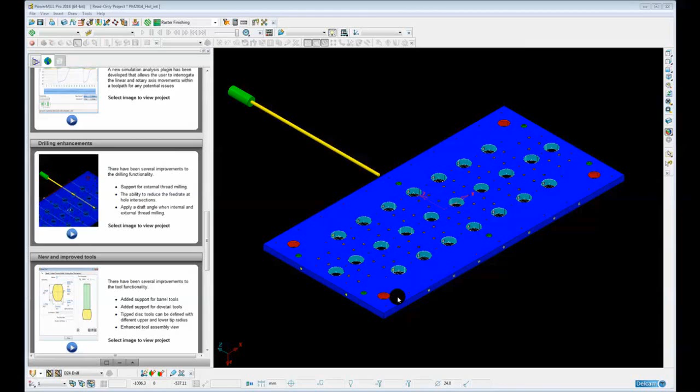There have been several enhancements to the drilling functionality in PowerMill 2014. Included in these enhancements are support for external thread milling using a thread milling tool, the ability now to apply draft to a threaded boss or a threaded hole, and finally the ability to reduce the feed rate when the drill breaks through an intersecting hole. This is particularly useful when gun drilling with small diameter, very long drills.

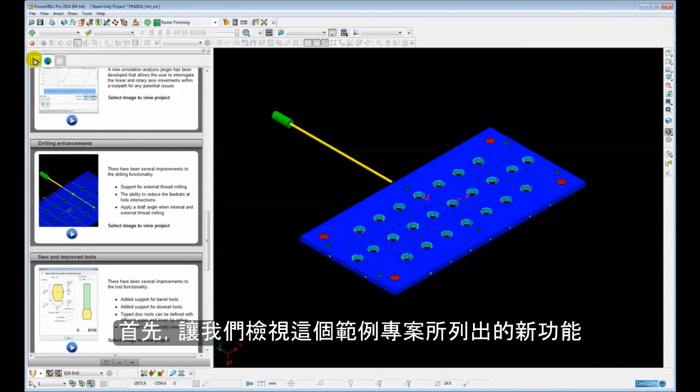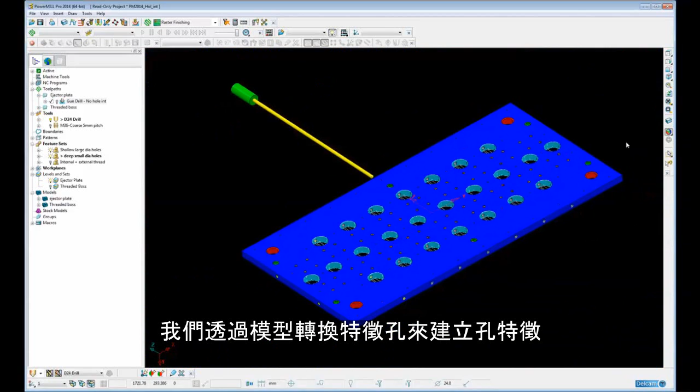Let's have a look at this list of new functionality in this example project. First of all, we're going to look at varying the feed rate at hole intersections. So here we have an example of a mold tool plate, an ejector plate, and we have a series of holes, smaller holes that intersect larger holes. We've already created the hole features by simply recognizing the holes in the model.

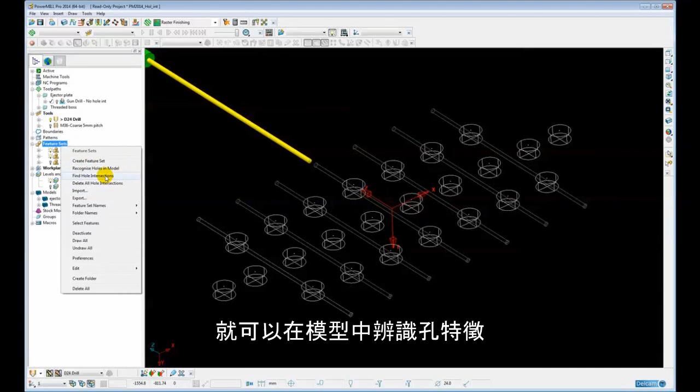Now, before we can apply the varying feed rate at the hole intersections, we need to find all intersections of all holes in PowerMill. This is a simple operation. We simply right click on the feature set. In addition to where we have recognize holes in model, we also have find hole intersections. So this will scan through all the holes and display and identify all the hole intersections. So here we can see the hole features are displayed with the hole intersections.

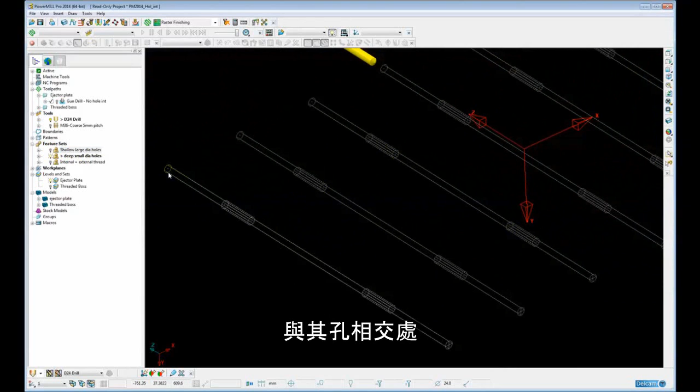So now it's simply a case of creating our drilling toolpath and activating the various feed rates at the intersection points. So I have a toolpath already created. If I go to settings, simply clone that toolpath. So just to show you how we vary the hole feed rates, we're going to create a single peck, drill hole to depth. Now you'll notice there's a new page on the drilling form called feed rate reduction.

So we're going to reduce the feed rate at hole intersections. Now I want the feed rate to be fully reduced at least 5 millimeters before the actual intersection of the hole, and I want the overall distance for the feed rate reduction to start to be, say, 20 millimeters. So from 20 millimeters to 5 millimeters, that's when the feed rate will be reduced, and I want to do that in 4 steps.

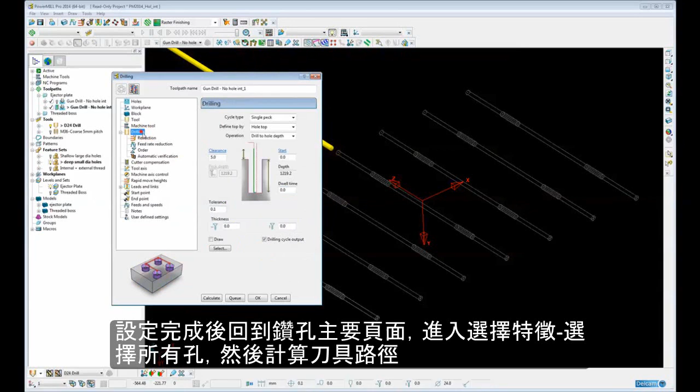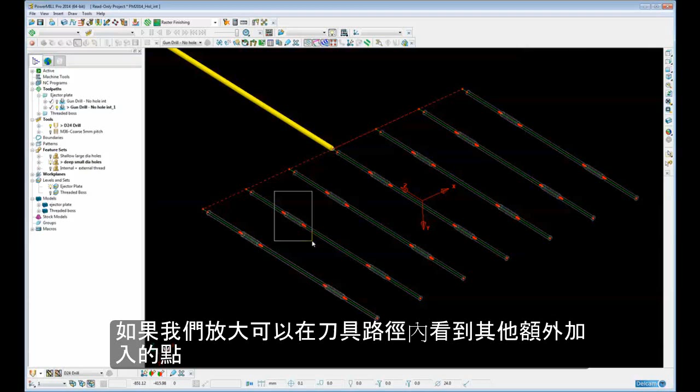And I want the final feed rate to be 30% of the general feed rate, and I want the spindle speed to be 50% of the general spindle speed. So if we go back to our drilling form and select all our holes, and then simply calculate the toolpath. So obviously the toolpath doesn't look any different until we switch on the draw points. And then if we zoom in, we can see it's added in extra points within the toolpath.

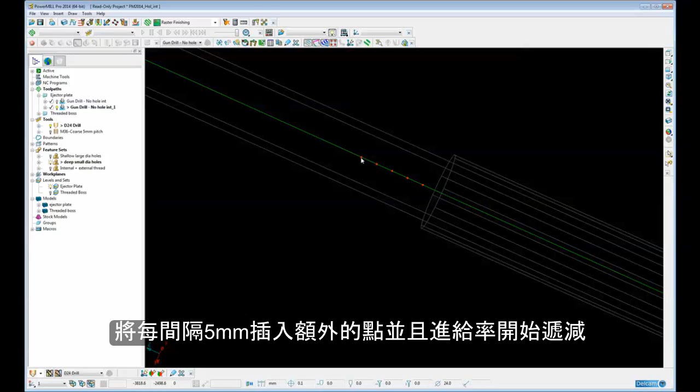So here we see at 5 millimeters before the intersection, the feed rate will be fully reduced, and an extra 20 millimeters on top of the 5 millimeters is when the feed rate will start to be reduced, and the feed rate has been reduced in 4 increments. If we want to, we can go to the drawing option, draw feeds, and then we can see the exact feed rates that are going to be used. So our general feed rate is 1000, and we drop down to 30%, which is 300.

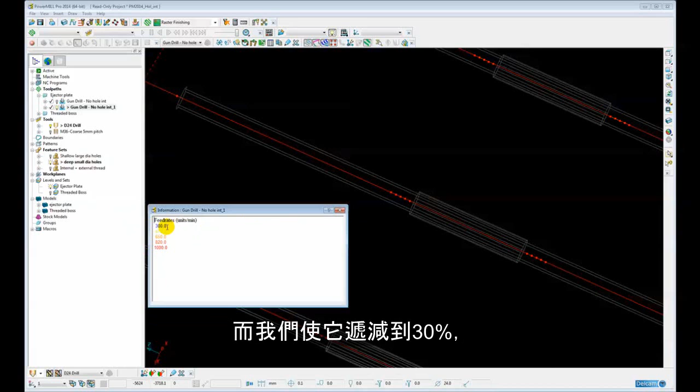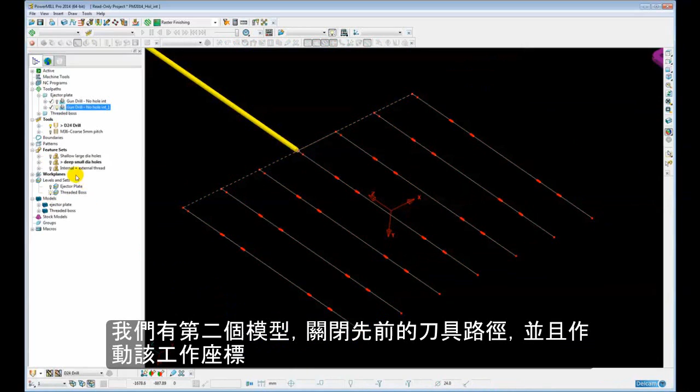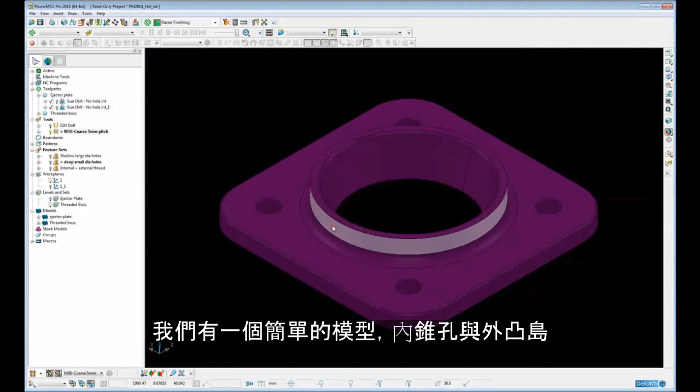The second and third new drilling enhancements involve thread milling. So here we have a second part. Just switch off the toolpath. Deactivate our work plane. So we have a simple plate with a tapered internal hole and an external boss. So we're going to apply a thread milling operation to both of these features.

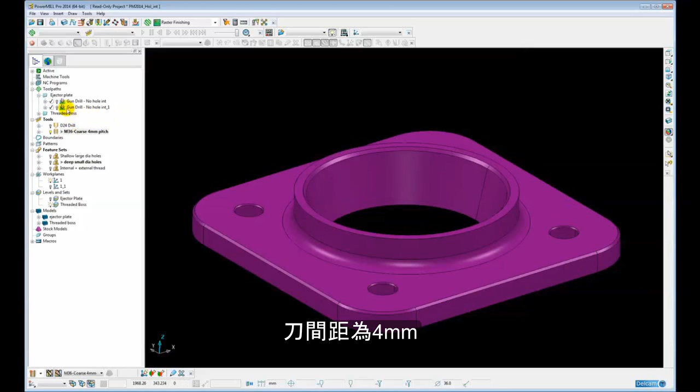First we need to create a thread milling tool. Now I have a tool already created. So it's a thread milling tool with a diameter 36 with a 4mm pitch. So it's M36 with coarse 4mm pitch. I have a toolpath already created to save time. Let's just clone that toolpath. So it's a thread milling operation.

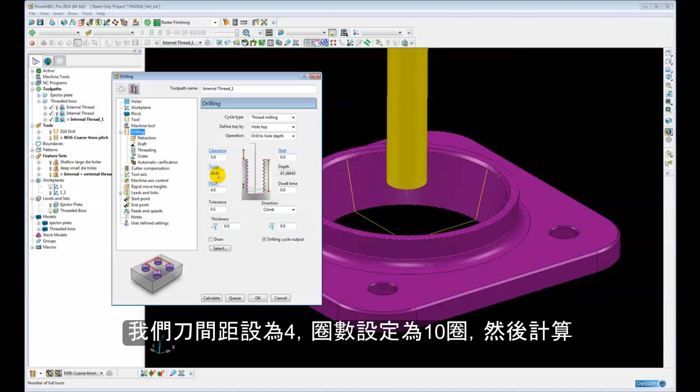And the new feature for 2014 is the ability now to apply draft to these threaded holes. So here we can see it's picked up the draft angle automatically from the hole feature. We're going to do a number of passes, right hand thread with an angle lead in, 4mm pitch, and we're going to do 10 turns and then calculate. Close. So there we can see the tapered helical thread for the internal hole.

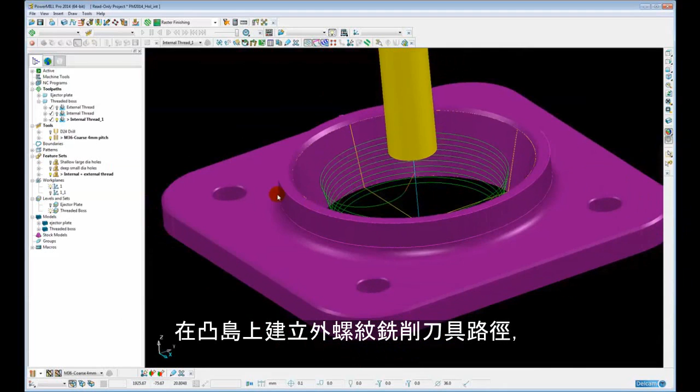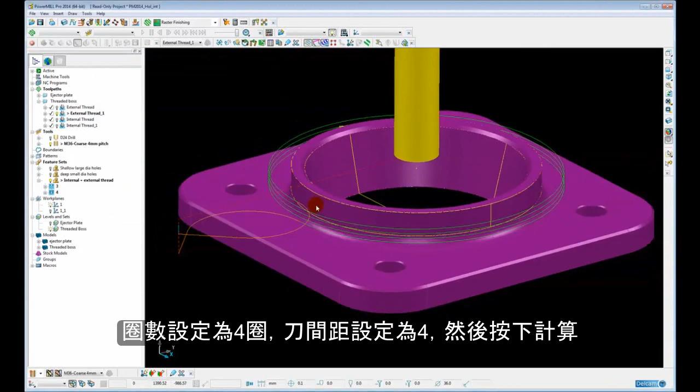To do the thread milling on the external boss, it needs to be defined as a circular boss, not as a hole, obviously. So I already have that defined in my feature set as a boss. And again, I have a toolpath pre-created with all the parameters saved, so I'm going to clone that. And then there's a new type of drilling cycle called external thread. This is new for 2014. And again, it allows us to use a draft angle if we have a draft angle. So number of turns 4, pitch 4, and then calculate. So there we have our external thread milling toolpath.